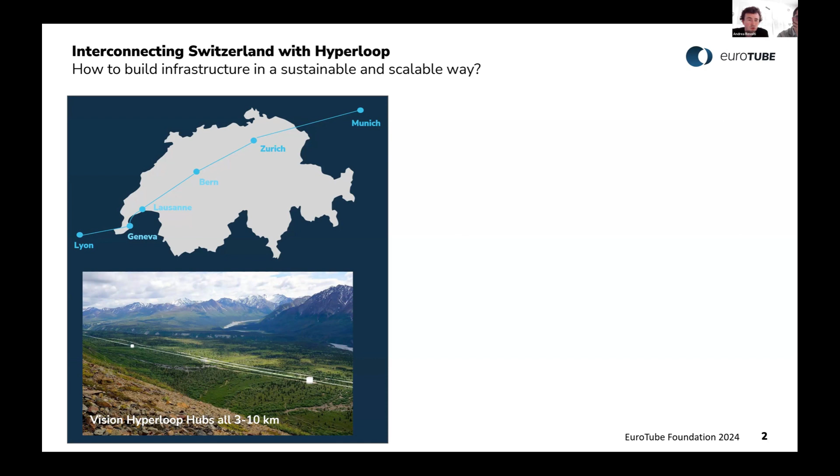For this, together with the University of Bolzano, ETH Zurich, and TU Delft, EuroTube has launched since 2022 a research project on how to realize so-called mobile factories, which are also smart because there is a digital twin behind them, such that we know specifically where along the route it makes sense to build this factory, so we're able to come in with the material, assemble the pipe work, and install it on site. Now I leave the word to Andrea, who will present more specifically how this mobile factory looks and how it's realized.

Thank you, Daniel. So today I will present some of the results of this project, called the Smart Mobile Factories for Infrastructure project. It's a collaboration between ETH Zurich, EuroTube, UniBZ (University of Bolzano), TU Delft, and Eindhoven. This is the site of the project, so if you want more detailed information you can visit it—I think it will remain available after the presentation, and we can share it on LinkedIn maybe.

Today I will speak about WP1, which is the design of the smart mobile factories and logistics. Then I will present some hypotheses for WP2 and WP3 with some specific ideas.

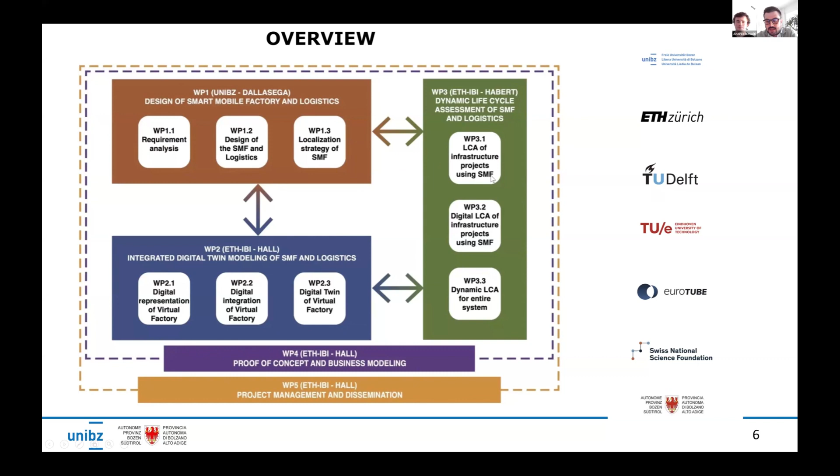The first WP was related to the design of smart mobile factories. So we had to understand the requirements of this factory, and we started to collect information with EuroTube. At the end of these meetings, we had a summary of the main and subordinate requirements for the smart mobile factories.

For example, one of the main requirements was to allow easy assembly and disassembly of the factory, obviously, and to allow adjustment of the factory so we can change its shape, dimension, and volume. We have to reduce the carbon footprint of the factory—so the idea is not to have a concentrated, static position for producing the Hyperloop rings, but to move the factory near the head of the building site and construction site to reduce the movement of all the pieces. We also have to minimize the logistics and intralogistics effort in and of the factory.

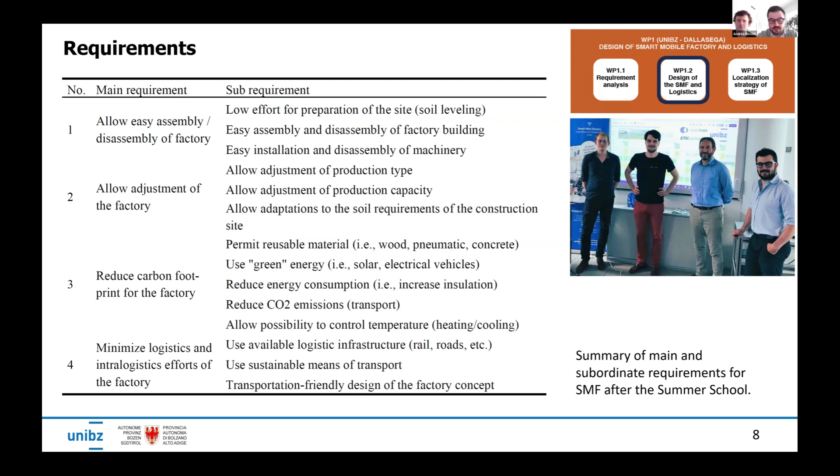After these requirements, we looked at the analysis of the volume and working areas we need. The idea is that we can use for the foundation of the factory a so-called 'tatami' foundation—an ancient idea from Japanese culture, in which with a unique module for the foundation, we can realize different dimensions and shapes of the working areas.

So by changing the site where we want to build the factory, we can have different volumes, different forms of the factory, without losing usability of the factory.

Then we move on with the idea that we can divide the factory. So we have module 1 that is specific for the prefabrication of the component. Then we have a drying area, and then an assembly factory for the assembly of the component, the post-tensioning, and the sealing of the finished tube, which is composed by 10 unique pieces of ring made in concrete.

These 10 pieces have to be post-tensioned, and then we have to create the vacuum inside with the procedure of sealing this tube.

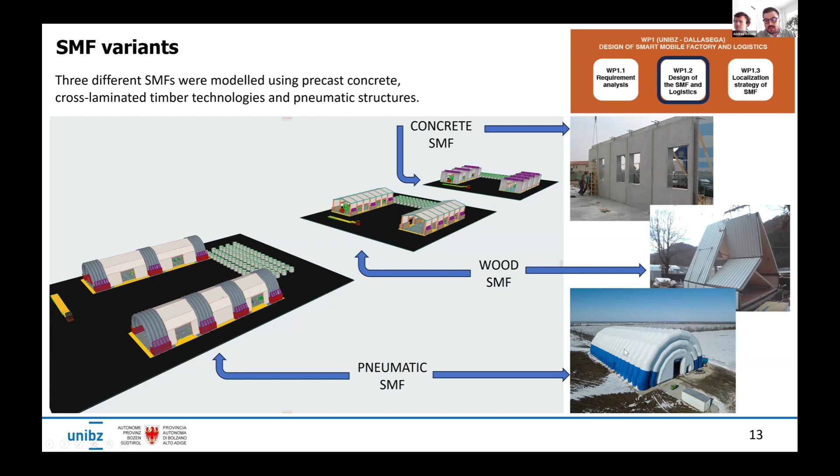The third one is composed by a pneumatic structure that we can use for a long time, and it's very easy to move to a new location and rebuild. Now I can show you a brief video of these three different options.

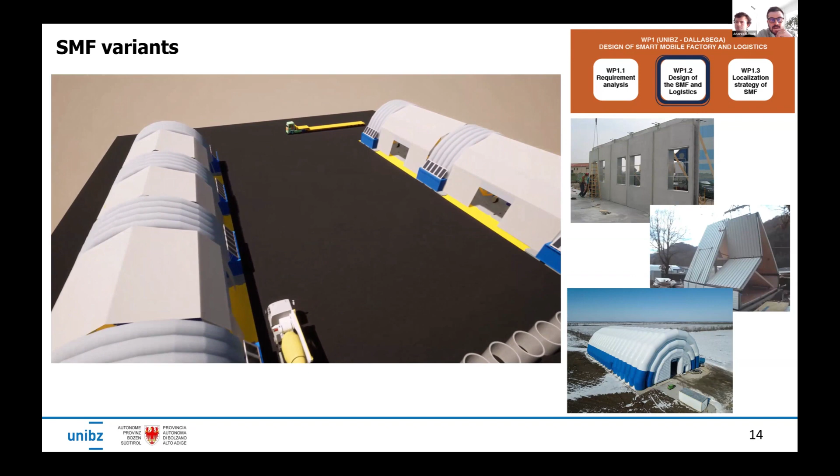This is the option with the pneumatic solution. You can see that we divided the factory into two different working areas. The first one, on the left, is for curing, construction, and creation of the unique ring.

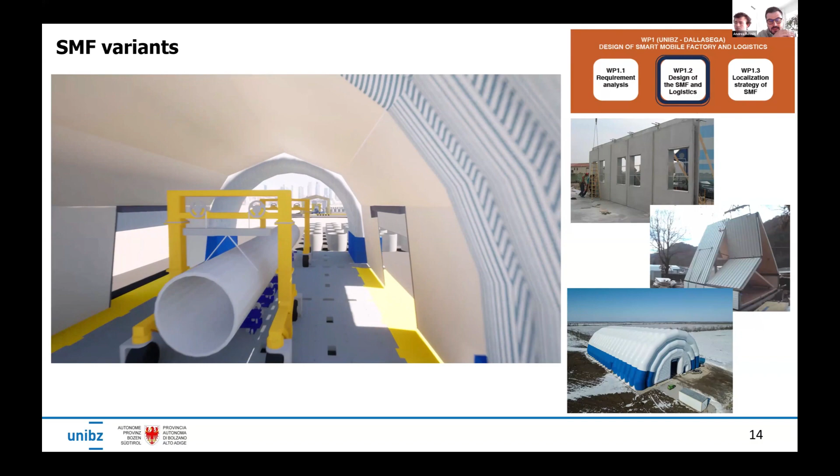In the second area, we build the final tube with the 10 pieces, and then perform the sealing and post-tensioning activities. Now we can move on to the second type of factory, made in wood.

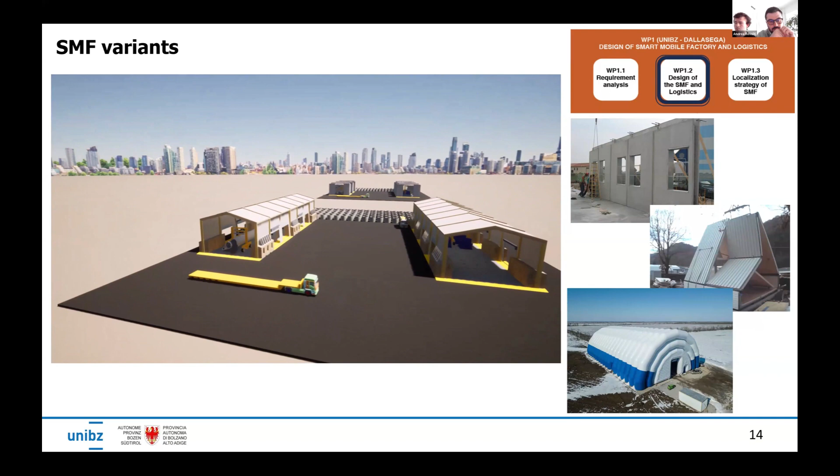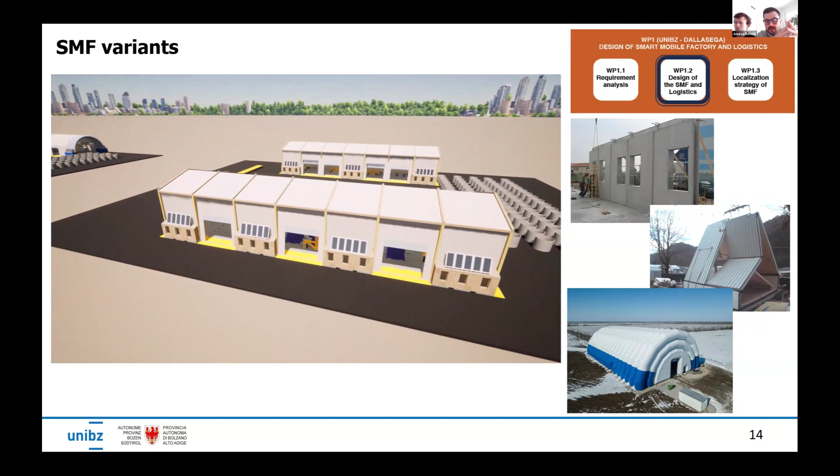That is a good option, but we have the problem that the elements in wood cannot be reused as many times as the pneumatic one, because of issues with the connections between wood-to-wood structures and wood-to-concrete connections.

And this is the third one, which is the most unfriendly from an environmental perspective, because we have to move the heaviest components for the factory, which are made in concrete.

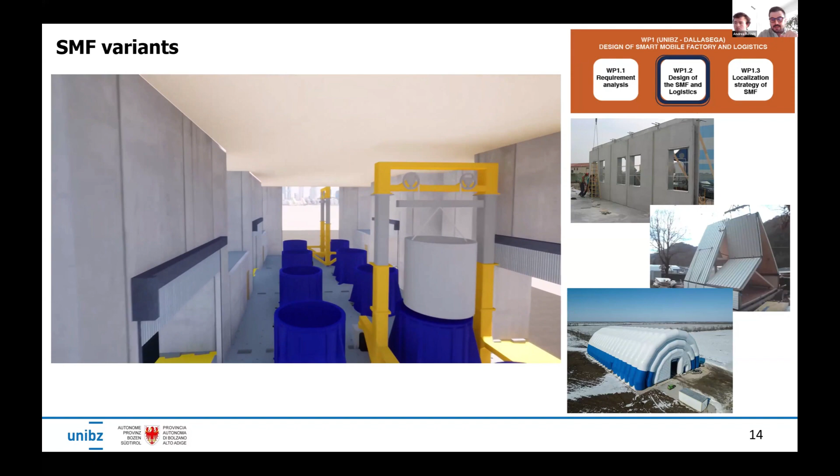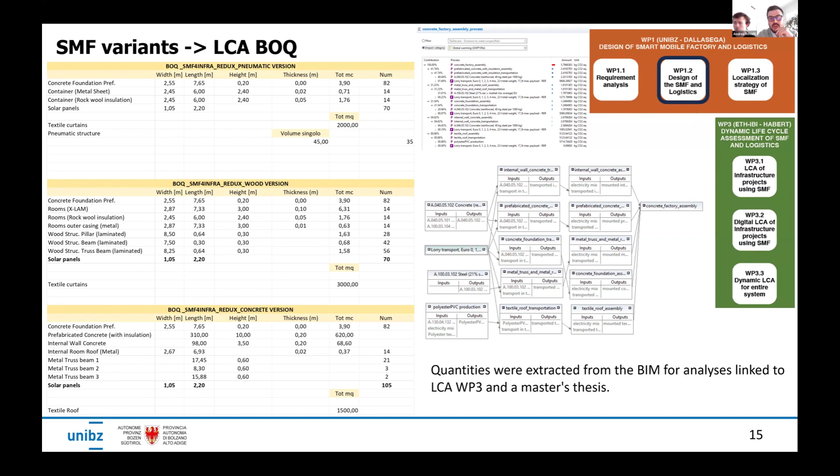Using this BIM model, I can extract the bill of quantities with all the components for the three different versions of the factory, and use this data to perform a life cycle assessment analysis to understand which is the most environmentally friendly and most useful type of factory over time.

Then I created the WBS, the work breakdown structure of all the activities we have to do for the construction of this factory.

In the first column, you will see the site layout setup with all the tasks. Then we have the prefabricated construction for the foundation and assembly on site. And then we have the 3 different options: the wood one, the concrete one, and the pneumatic one.

We can see that the pneumatic one is the easiest to assemble, and costs less in terms of environmental cost, using less machinery as well.

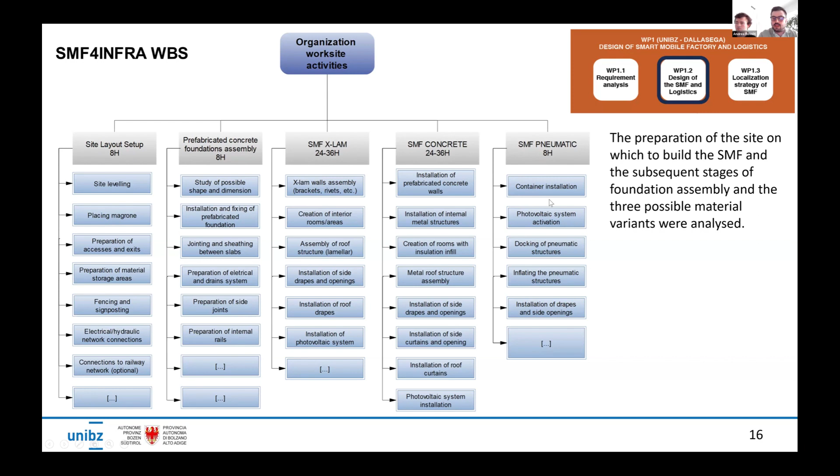So we have some machinery that we have to use for the preparation of the layout, the site, and the assembly of the foundation. We cannot change this part of the environmental cost.

But if we can choose which is the least complex to build, obviously we can go with the pneumatic one, because we need a truck with a crane to move the pieces of the container, and then another truck with only a compressor to build the factory.

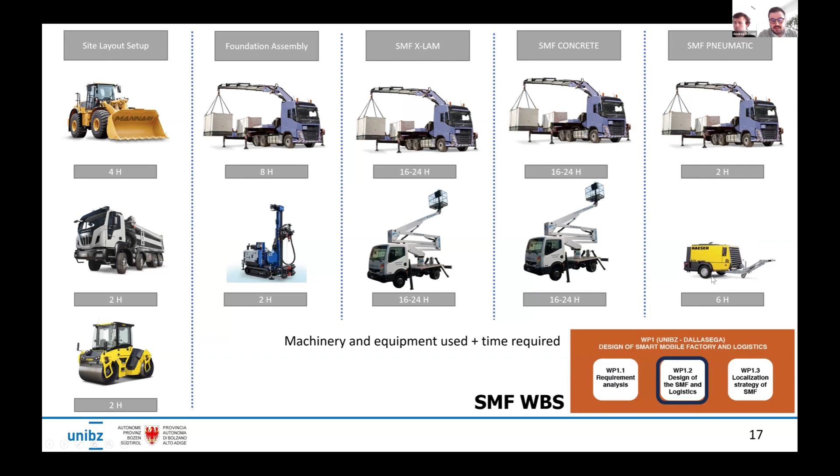We can also study different layouts of the factory. In this case, it's called layout T. So the factory is a unique single piece with the drying area above, and the strength is that you have one single structure, so you will have less construction effort, but we have several shortcomings.

For example, higher transportation effort. Mixer trucks have to go inside the factory, so we have air pollution, more noise, and it's not possible to split module A and module B to work independently.

Then we have layout L, in which the factory is split into 2 modules, and the strength is that we have more flexibility of working spaces, less transportation effort, and module A and B can work independently.

We have indeed some shortcomings. The module 1 and module 2 are divided, needing more time to build. We have difficulty with FIFO, the acronym for first in first out, for the component storage area. Also, the mixer truck has to go inside the factories in this case.

Then we have the S solution, which is the most interesting to build if we have enough space in the construction site, giving more flexibility, less transportation effort, and again module A and module B can work independently. The shortcomings are similar to the L solution, but we can see in the comparison table.

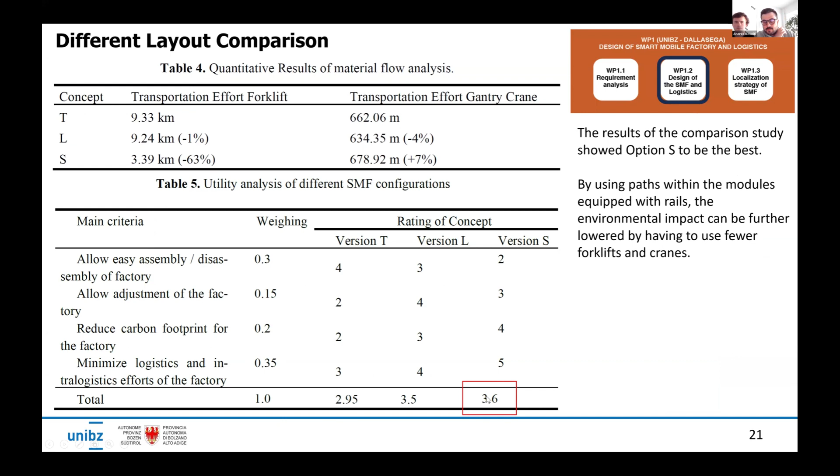We have less effort for the movement of the component, because we can move it directly, maybe using some railways inside the factories, to the drying area, and again it's easier to introduce to the sealing part and assembly part of the factories.

Each component and every asset of this BIM model is modeled uniquely, and I created a specific library with attributes that we can use when we want to extract and use the model in the Unity environment.

So going through versus the digital twin environment, in which we can add physics, real movement, and real sensors to the model, because the BIM is a sort of static photo of the working areas, the tasks, and the movement of machinery inside the factory.

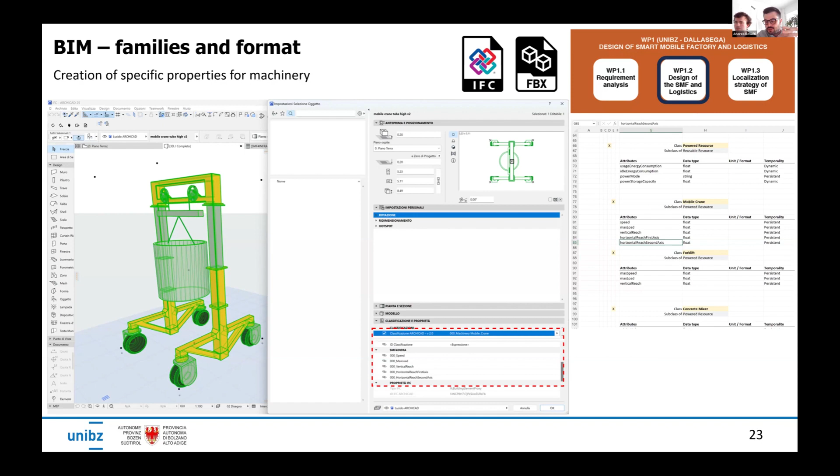With the digital twin, we can have real-time data that comes from the real factories in the future, and we come back with the real data that we can use also in the digital model of the factories.

We can divide the digital twin in two. We have a system monitoring of the building scale with also external data — that is the monitoring of the working and construction site of the factories, the scheduling of construction activities, the shape and space needed for each task and working area, and the optimization of the internal conditions of the factories.

And we also have real-time data of the logistics, with management of storage logistics and component movement. Then we can have another type of digital twin on the machinery scale, where we can focus on the mixing concrete area with temperature and mixer data, so we have real-time data of the concrete that will create the unique ring.

We also have the possibility to look after the alignment phase or the pipe sealing phase, where we also control whether we've reached the vacuum inside the final 20-meter pipe.

This is an idea of a digital twin, using maybe VR or AR assets like HoloLens or Oculus. We can have a look inside the factories and have dashboards with real-time data on how our machines or working areas are really functioning, whether we have the correct internal conditions in the factories, or maybe some danger coming for the workers inside.

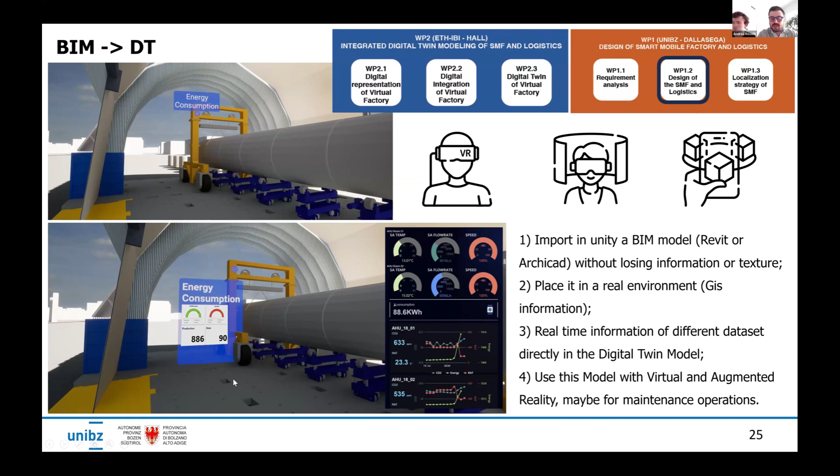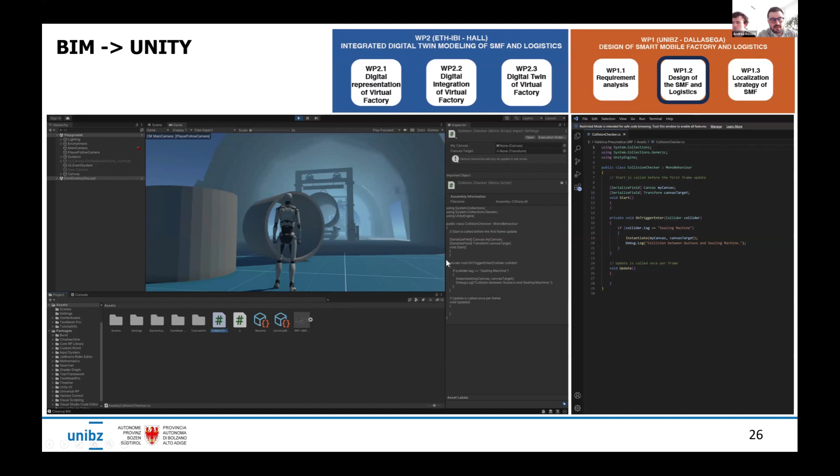I created a first hypothesis of moving inside the digital twin of the factory. This is my avatar, which I called Gustav, that can work inside the factories, look after information, and move some components. This is an environment in Unity, and I started coding to make some tests of the digital twin of the factories.

Then I moved also into the GIS environment, where I tried to locate the factories in a real environment. You can see the location of the factory, a hypothesis along the track between Zurich and Bern, and we found some locations where we could really build the factories.

And we made some tests also in a 3D environment, in which we can place the working area of the factory nearby the pipes that pass by the city.

Now, to finish my presentation, I can have a final focus on the wood hypothesis, which is very interesting for South Tyrol, because South Tyrol is well known for the wood industries.

So we tried to improve the biggest problem of the wood factory — not the material, because wood is very friendly for the environment, but we have to focus on the connection, which is the part that we cannot reuse as many times as we would want.

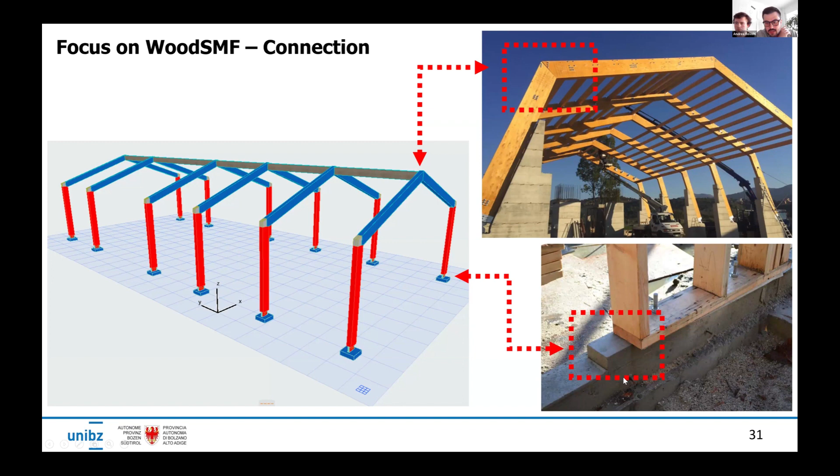With a bachelor thesis that I followed as a tutor, we collected information on specific nodes, the wood-to-wood connection and the connection between wood structure and the concrete foundation. We made a hypothesis to have three different connections with the concrete, and we decided on some characterization in which we could vote and compare.

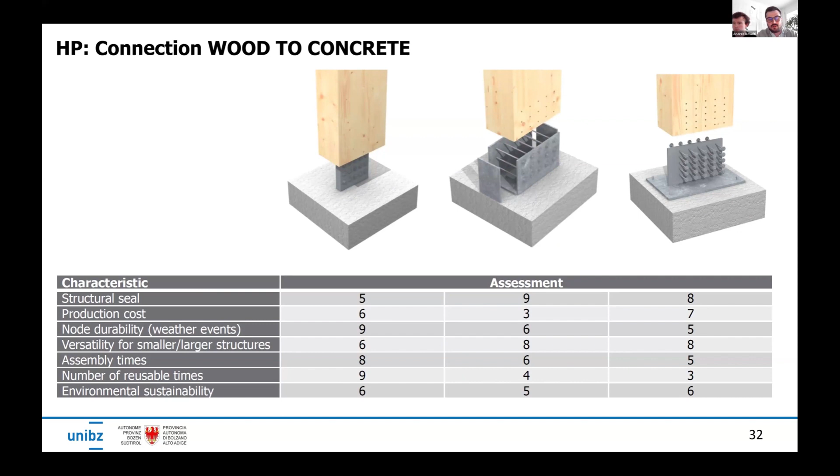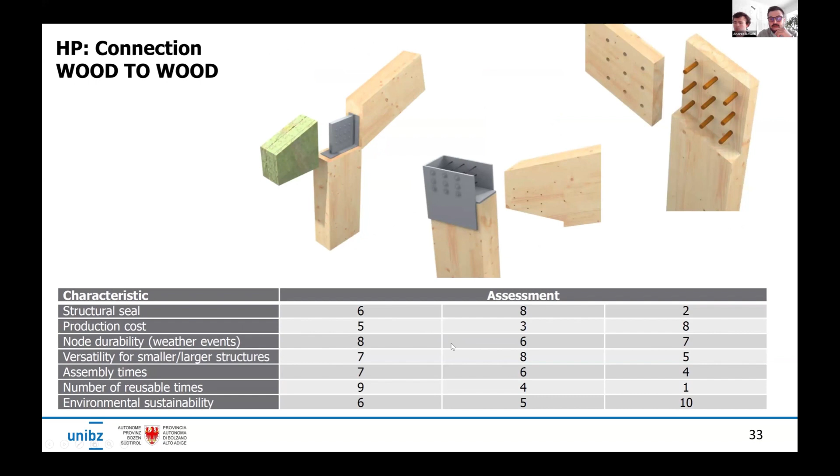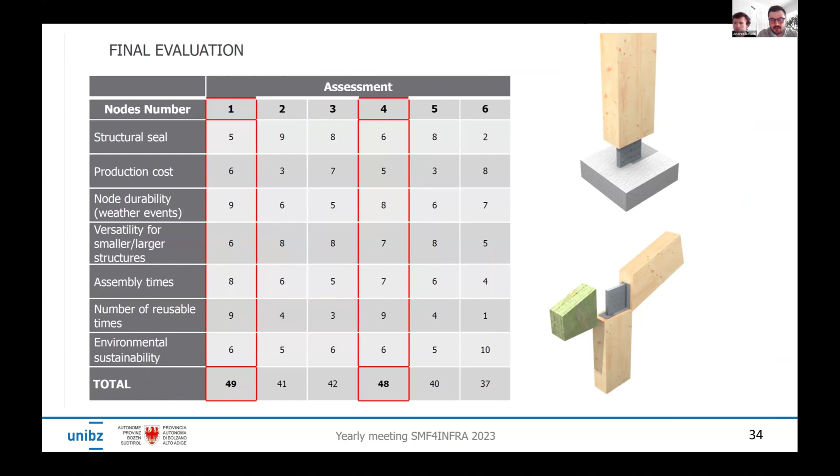Criteria included structural seal, production cost, durability, versatility, assembly time, number of reusable times, and environmental sustainability. We created the same comparison for the wood-to-wood connection, also voting with the local company, and decided on the final solution that makes the wood structure more reusable.

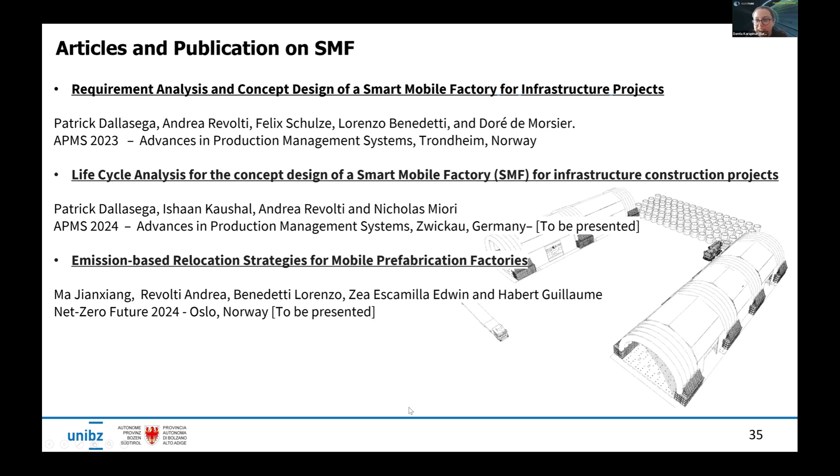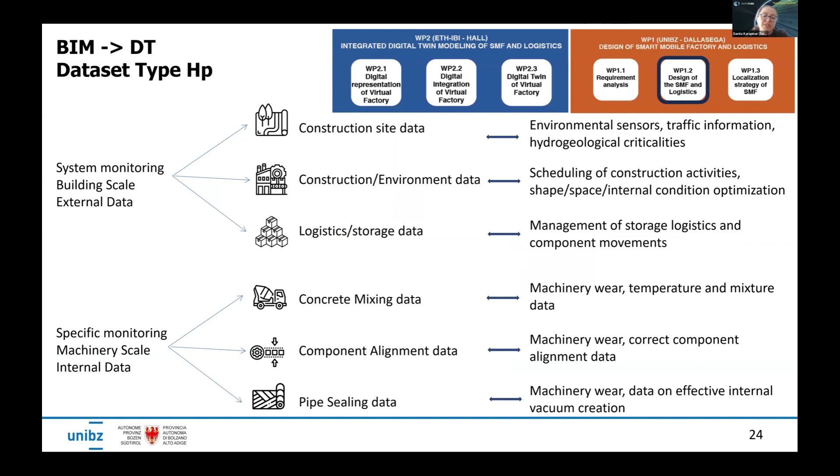Thank you, Andrea, it's very interesting, at least for me. I thank you for your presentation too. I've seen a couple of questions in the Q&A I might address now since we have time. The first is about the Hyperloop landscape - many organizations are designing with steel, not concrete, like Eurotube. How do you imagine smart mobile factories for steel tubes instead of concrete tubes? Do you have any plan B for steel tubes?

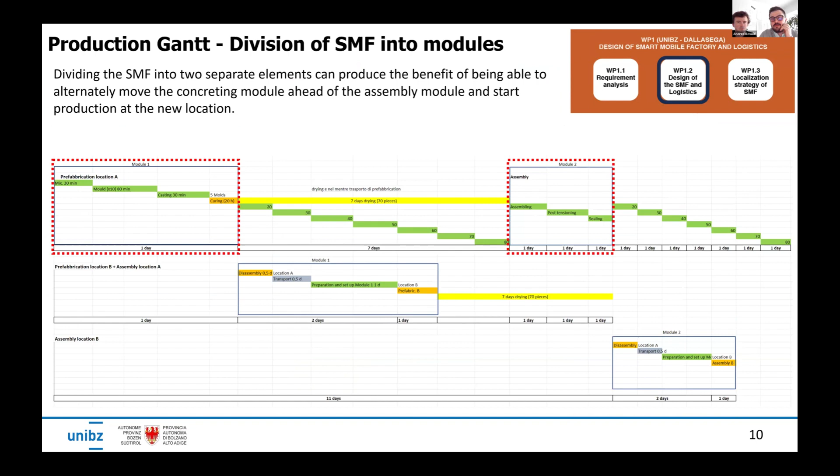I think the idea of a reusable shape for the factories can change if we need more or less space. With the tatami approach, for a steel construction we might not need some working areas, like the curing part of the pipe. So we'd need less space, and we can reduce the entire factory with fewer components and foundation pieces, and the height may need less space too, so we can reduce using the pneumatic tent very easily.

Instead of concrete, we can also use steel production or other types of production, because we can build railways, bridges, or reuse these factories for any infrastructure project, in my opinion. So the idea of mobile factories isn't connected only to Eurotube production - these are use cases, but we can use the factories anytime for any other infrastructure production.

Good, good, it's very good to hear it's not limited to only concrete use cases. So the next question: this smart mobile factory concept would be very interesting for potential private companies or even state governments, for sure, because they might use this concept for tenders, for example in Hyperloop projects. Do you have any plans to let them use your concept? Do you have any commercial purposes after your PhD?

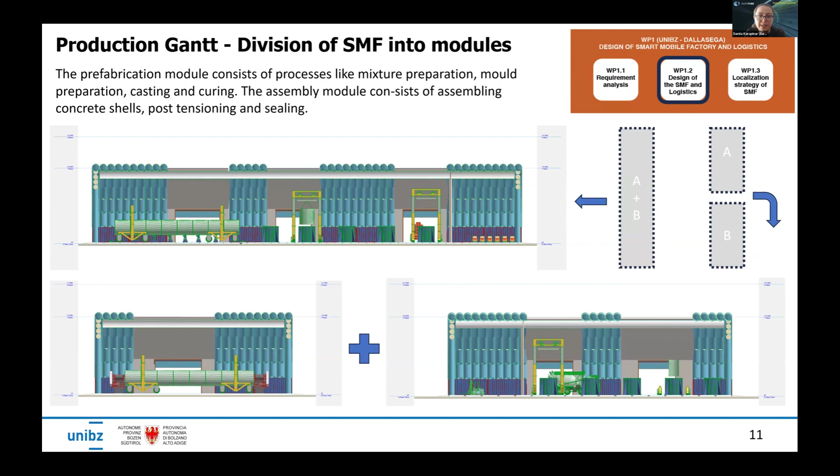We'll see. Good, we're looking forward to it. There's one more question: you have some layout types like S, for example - does this layout type really depend on the surface area available for the field lab?

Okay, and then how will you make sure you choose the best layout type? In this case, we don't have to choose the best layout, but for future ones we will.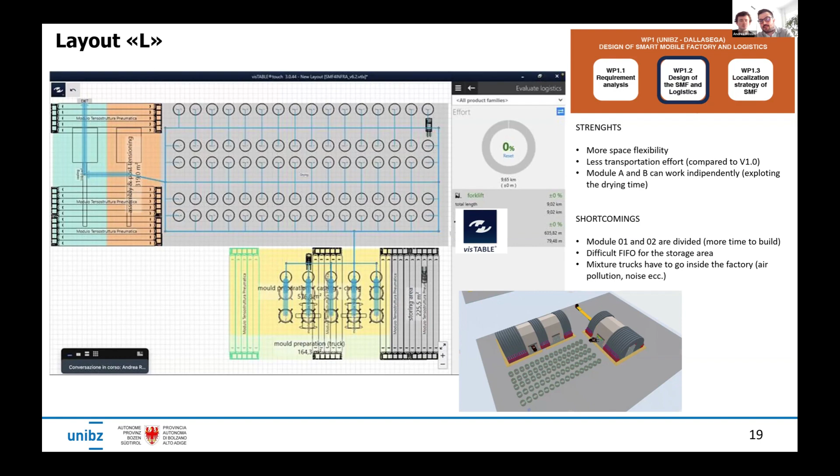We have to make an adaptation of the optimum to the real construction site. This is the site and the shape, if we have enough space to build in this form. But the field lab has a very restricted constraint because we are in an airport and have a real building nearby. So we have to maybe use a shape that is not so convenient, but useful for that case. So maybe it won't be so optimized, but we have no choice in that case.

So we'll see. Good, very good. Thank you very much for your presentation.

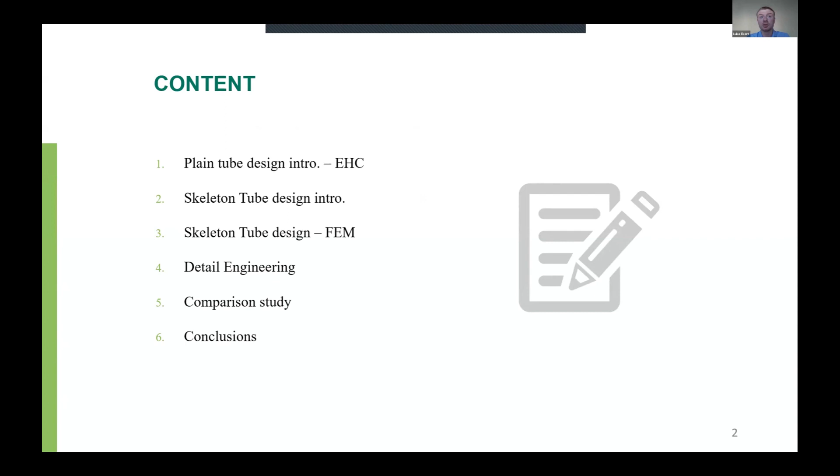Here is the content of today's presentation. First, I'll briefly talk about the benchmark design, the plain tube design, currently used at the European Hyperloop Center in Groningen, Netherlands. Then I'll introduce the skeleton tube design, as well as its results. I'll also talk about detail engineering for the skeleton tube design, and showcase the comparison study between the plain tube design and the skeleton tube design. I will end this presentation with conclusions.

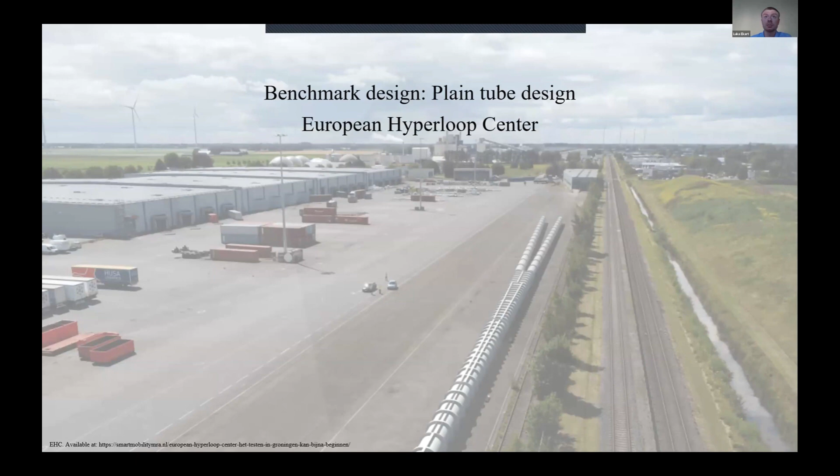The benchmark design is the already existing design located at the European Hyperloop Center. It was designed by Hardt Hyperloop, and I've named it the plain tube design, which is a simply spirally welded design. I had the opportunity to visit the production site as well as the test site in Groningen.

The global dimensions of the test site are as follows: total length is 420 meters, a single tube segment measures 16 meters in length, it has a diameter of 2.5 meters, and the thickness of the tube is 16 millimeters.

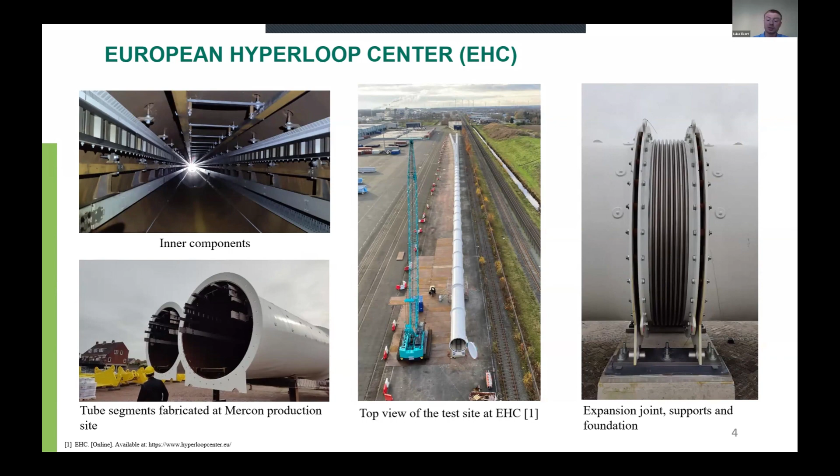This design by Hardt Hyperloop has been validated and analyzed, and it serves as a benchmark design in this research. Now, what are the infrastructure concerns?

Some of them are passenger safety, financing, government regulations, public acceptance, maintenance costs, and also, due to the potential length of the Hyperloop infrastructure, a big factor of environmental impact. Due to that, many engineering firms are continuously researching and developing lightweight Hyperloop tube designs.

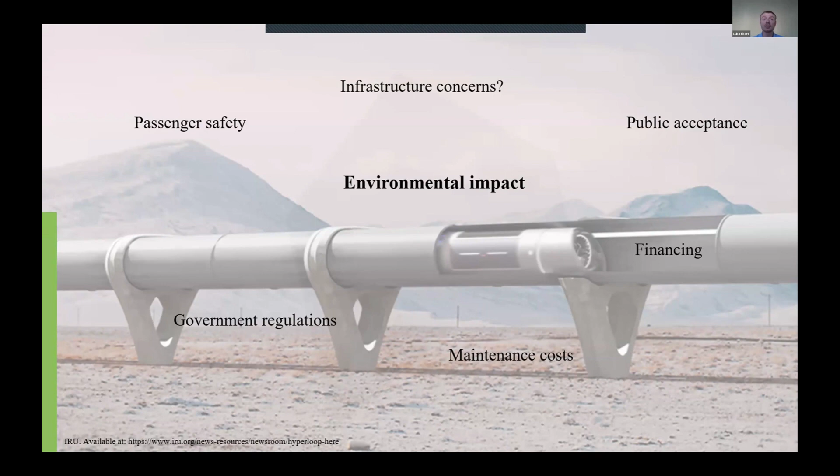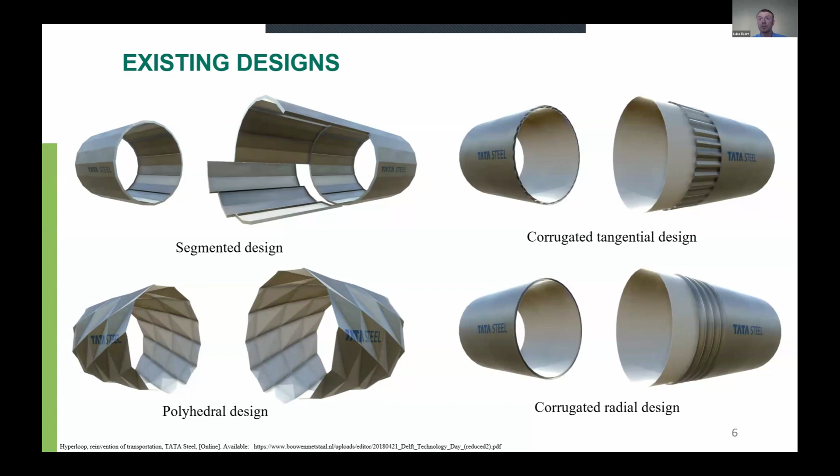Some of them are presented on this slide, all promoted by Tata Steel back in 2018. They can either be single layered, as seen on the left-hand side, or double layered on the right-hand side. Although they might differ in their cross sections, they have one thing in common: all of them are lightweight. Another such design is the skeleton tube design, which was the focus of this thesis.

The global dimensions of a single tube segment are the same as the benchmark design, the plain tube design, where the length is 16 meters and the diameter is 2.5 meters.

Now I'm going to run an animation to showcase how the tube is constructed. A single tube segment has 16 rings, spaced 1 meter center to center. There are 18 stringers, which are the longitudinal members, and consequently also 18 plates. Those components will also now be seen on the right-hand side, so I talked about the stringers and the rings, as well as the plates.

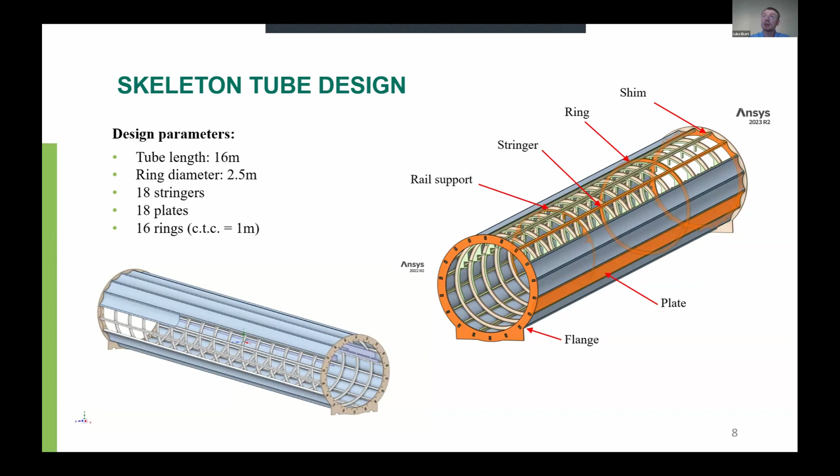Furthermore, we can see flanges, which mark the beginning and end of each tube segment. Then we see rail supports onto which the rails are attached, and then the shims. The shims are attached to the flanges, fully fixed, and they have two purposes: one is to support the stringers in those slotted holes, as can be seen here, and then they also have a saddle onto which the plate is transversely connected.

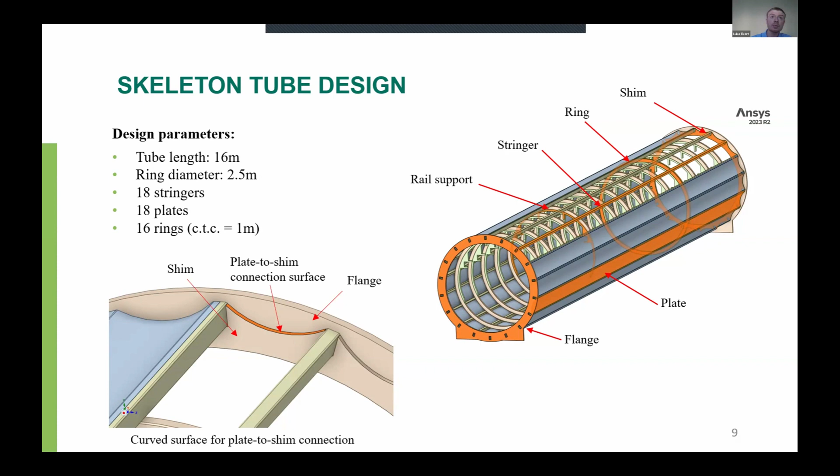Now, the skeleton tube design has been showcased by Tata Steel for the first time in July 2022 in one of their promotional videos, and then furthermore it was presented during the European Hyperloop Center kickoff event. You can also see two models, the plain tube design and the skeleton tube design, one next to the other.

Now, what does it remind us of? It can remind us of an aircraft's fuselage structure or a submarine structure. And in both cases, we can see the rings, the stringers which connect the rings among each other, and then the shell which forms the shape.

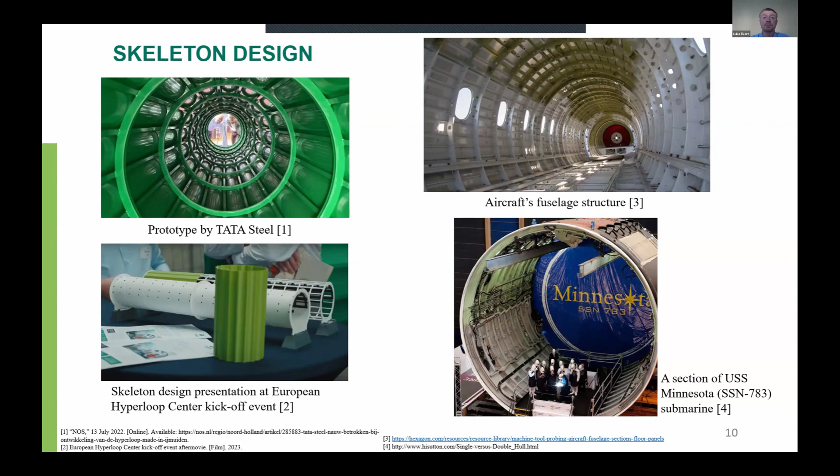Now, before I'll present to you the FEM results, and before I could make a global model, I had to model rail supports. I started out by identifying the location of the inner components. Then the first iteration of the rail supports was just a ring reinforcement, and based on the location of the inner components, I've designed the rest of the rail supports.

At this stage in the analysis, the model exhibited a plastic response at those two locations. This is because of a sudden change in stiffness of the ring, and therefore the stress surpassed the yield strength. Therefore, I've extended the edges of the rail support, and this did not only mitigate those stress concentrations, but it also additionally reinforced the structure.

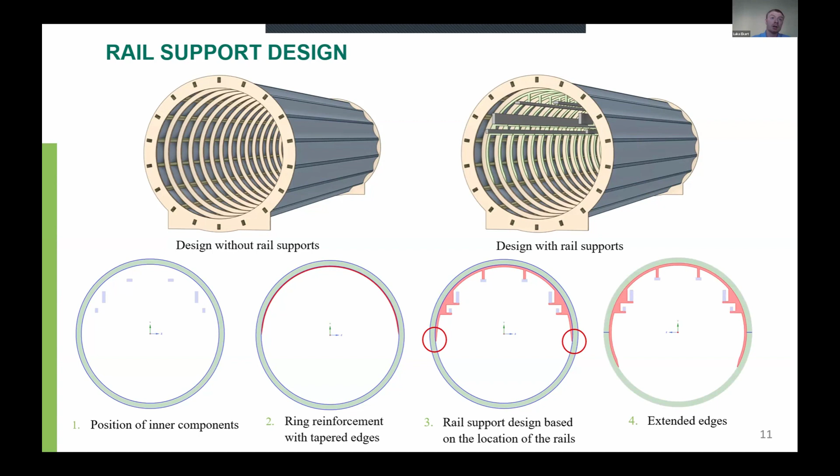So in this research, I've made two assembly models: the full-scale model, the 16 meters long model, which was to verify the global vertical deflection, and then a shorter model, which had more details, a 5 meters long model for the ULS verification, as well as for the buckling analysis.

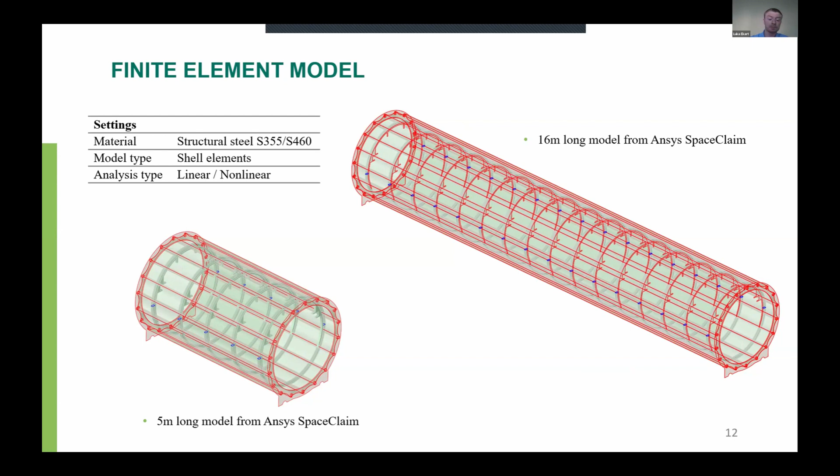Now I'll go through the load cases which are considered in this research. First of all, it's the self-weight, which is self-explanatory. Then we have the vacuum pressure, which is acting on the plates, on the inner surface of the plates. Now, the vacuum pressure is uniformly acting on the inner surface, and moreover, it's acting normal to the surface, looking at the figure on the bottom.

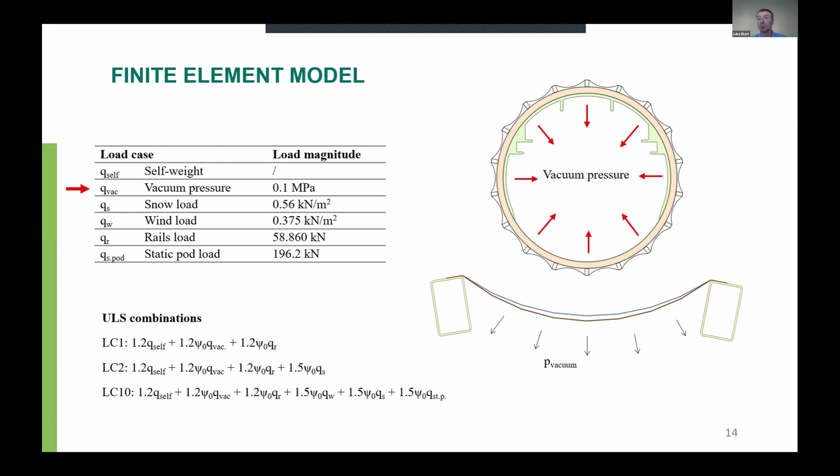Furthermore, the snow load was added on the top of the tube, the wind load acting from the side, and then we have the rails load and the static pod load, which was assigned at the locations where the rails were supposed to be attached, those red surfaces.

In this research, I've considered 10 load combinations. In this presentation, I'll present 3 of those: LC1, LC2, and LC10. Now, LC1 only considers the vacuum pressure as the critical load case. In LC2, the snow load is added on top of it, and the critical load combination, LC10, considers all of the load cases which I've just presented.

So let me continue with results. First, I've verified the global vertical deflection. The SLS load combination was used for this analysis. Now, there are 2 deflection limits. The first one is imposed by the Eurocodes, which is 3.5 millimeters. And the second one is imposed by the levitation rails.

Now, the levitation rails are made out of 1 meter long segments, as seen on the bottom figure. And there is a 1.5 millimeters allowed vertical misalignment for the rails to be operational. So this is a second deflection limit.

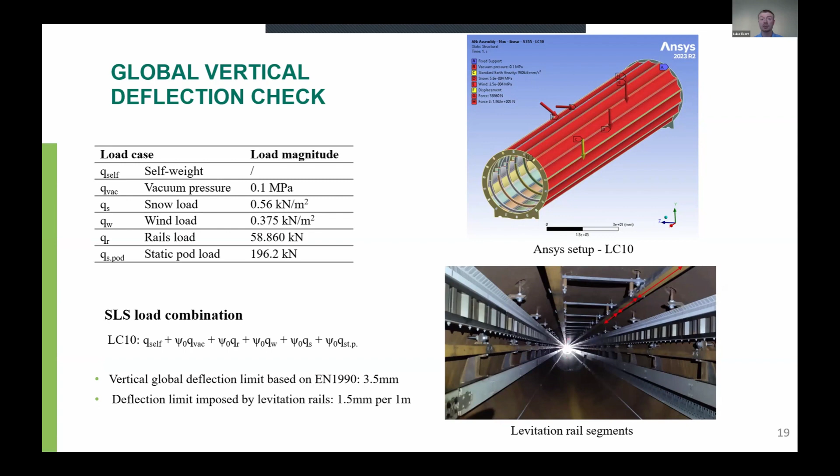And upon analyzing the assembly, the global vertical deflection resulted in 3.34 millimeters. Now you can see that I've taken the data from the side of the ring. This is because a vertical ovalization is expected in the rings of the structure of the assembly. But when you take the data from the side of the ring, those results are unaffected by vertical ovalization.

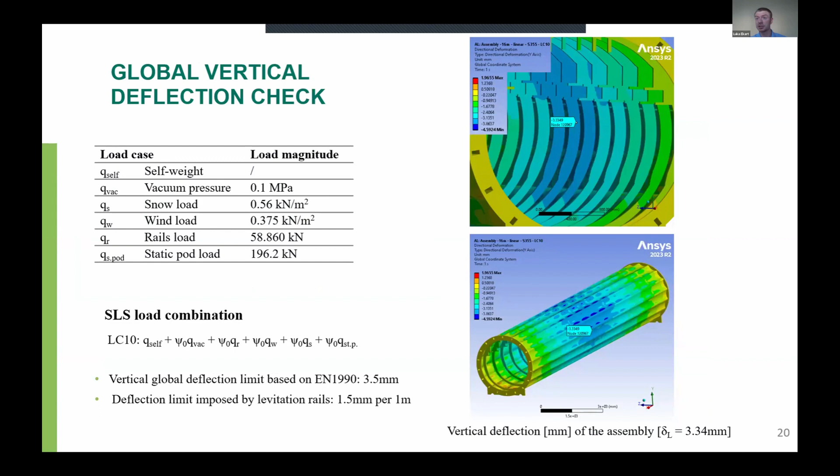And to add, based on the global vertical deflection, the deflection is satisfactory. Then I'll present to you the local deformation of components.

Now, in this graph, you can see deformation of critical plate, stringer, and ring. Now, 3 load combinations are presented in this one graph, and those load combinations are also marked with the time steps, as seen over here.

Now I'll run an animation just to showcase how the deformation propagates during load combination 1. So on the top right, you can see the development, and we can see that the largest deformation exhibits in the plates.

Now to also showcase the deformation of the frame, I've removed the plates. Now this deformation is scaled up just for visualization. On the bottom, you can see that the frame gets squeezed together. So the largest deformation can be seen at the side of the tube.

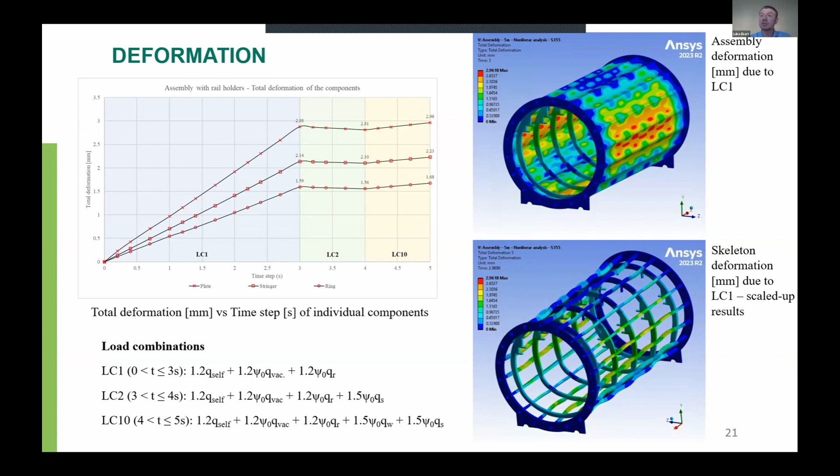Now this can be justified by looking at the stiffness of the rings. When I modeled the rail supports, they are fully fixed onto the rings, meaning that the stiffness of the rings is severely increased on the top side, while the bottom side of the ring has a decreased stiffness. At 2 locations, we can also expect a hinge-like behavior, because this is where the stiffness suddenly changes.

Now I'll run an animation of a single ring deformation. Once again, it's scaled up just for visualization. The wireframe will also represent an undeformed shape.

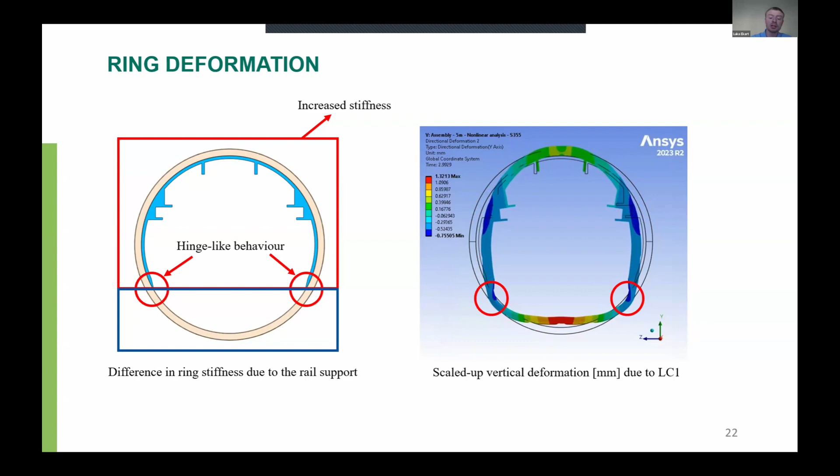So what we see is that the sides of the ring get compressed together. Furthermore, we see two hinge-like behaviors, as stated before. What else can be concluded is that we can define the major axis, or strong axis, of the ring, and the weak axis of the ring.

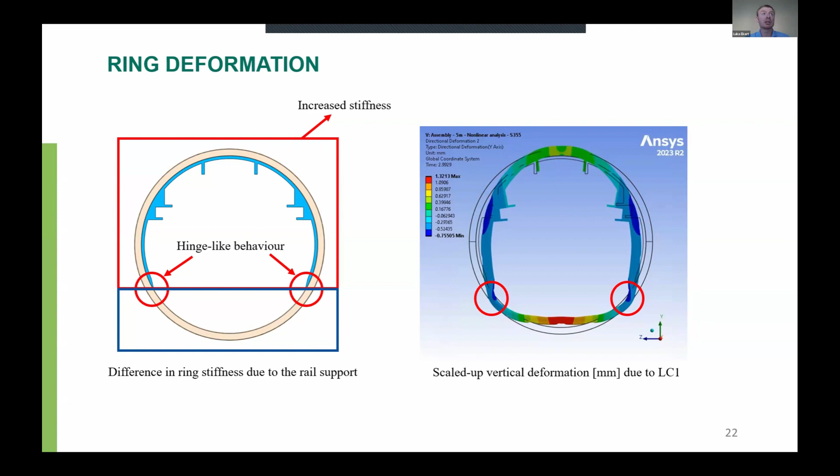Next, I'm going to talk about the plate deformation. Upon closer investigation, I noticed that the plate did not uniformly deform, but there was a larger deformation at the sides of it, while the middle had a smaller deformation.

This can be explained by taking a single strip from the plate, positioned between the rings. I've taken the cross section of it and scaled up the deformation, and you can clearly see a sinusoidal-like deformation.

This can be justified by deconstructing the forces within the plate. If we deconstruct the force at the side of the plate and look at it from the global coordinate system, it dissolves into a horizontal force component and a vertical force component, while in the center of the plate there's only a vertical force component. Due to the horizontal components, the center of the plate is tensioned, and consequently the deformation is lessened.

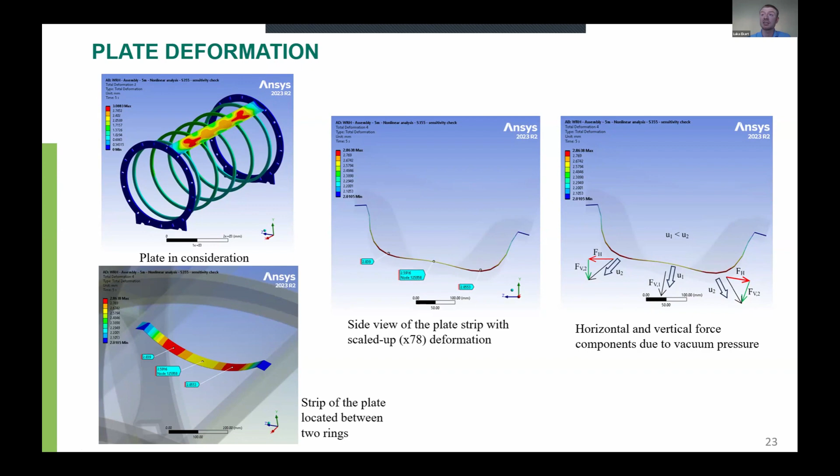Next, I'm going to talk about the strength verification. This graph can be read in the same way as the previous one with deformation, but in this case, on the y-axis we can see stress.

I'll run the animation of the stress development within the assembly on the right-hand side, due to load combination 1. Now we can see that the stress concentrations are visible at the locations in the ring where the rail support ends. This was as expected, and the largest stress was 342 megapascals, which is below the yield strength of 355 megapascals.

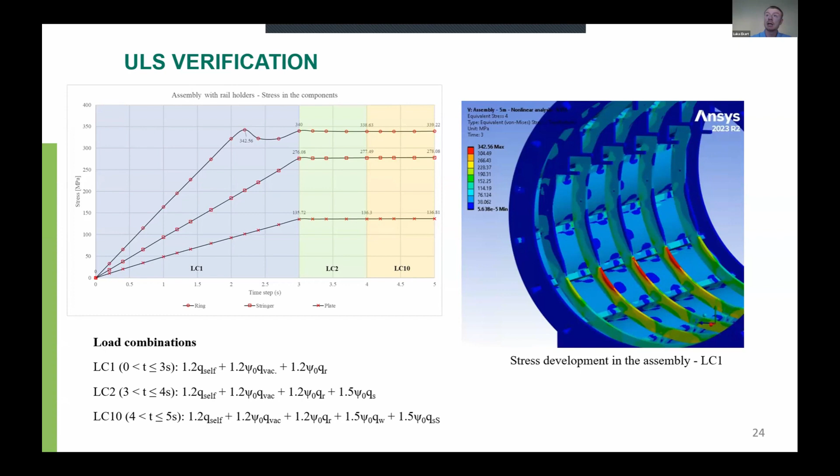Upon further investigation, I noticed more stress concentrations. In the top figure, you can see the one visible in the animation, and in the bottom figure, there are stress concentrations at each and every stringer-to-ring connection, and this is also where the stress reaches 342 megapascals.

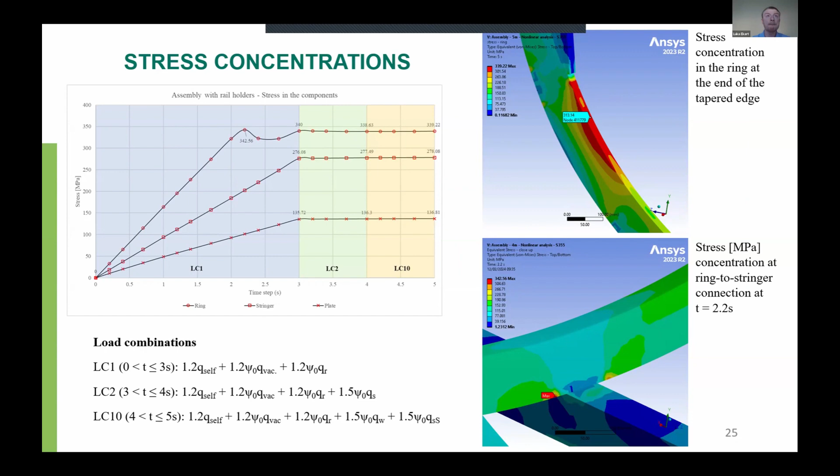Next, I'm going to present to you the eigenvalue buckling analysis. To understand the load path due to the critical load case, which is the vacuum pressure, the force is transferred through the plates onto the stringers, and then through the stringers onto the ring.

For this verification, I've used a full nonlinear analysis approach based on DNV standards, with the following workflow. First, I ran a linear buckling analysis.

Then I chose the buckled shape that I wanted to investigate. I determined the imperfection scaling factor, which was also done based on DNV standards, and then I ran a full nonlinear post-buckling analysis.

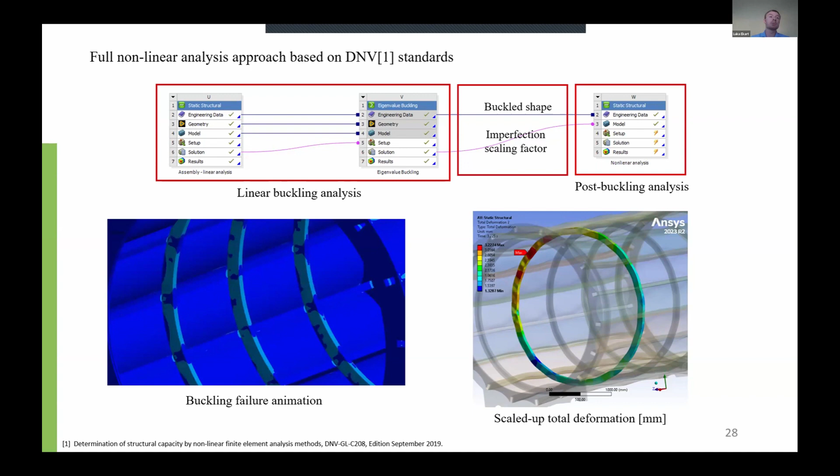Now I'll run the animation of the buckling failure. If we focus on the central ring, we can see that at a certain point it will simply buckle inwards, and at this stage, this is a collapse of the structure.

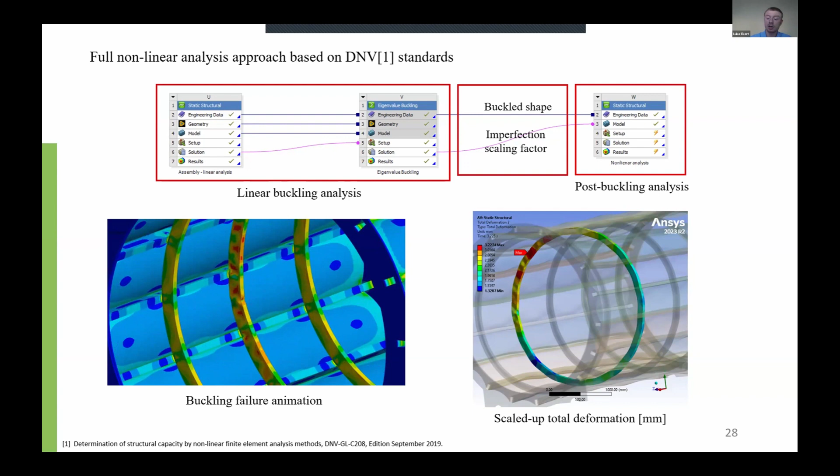I investigated this buckled location from up close. We can see that the webs of the ring buckled outwards, while the flange of the ring buckled inward.

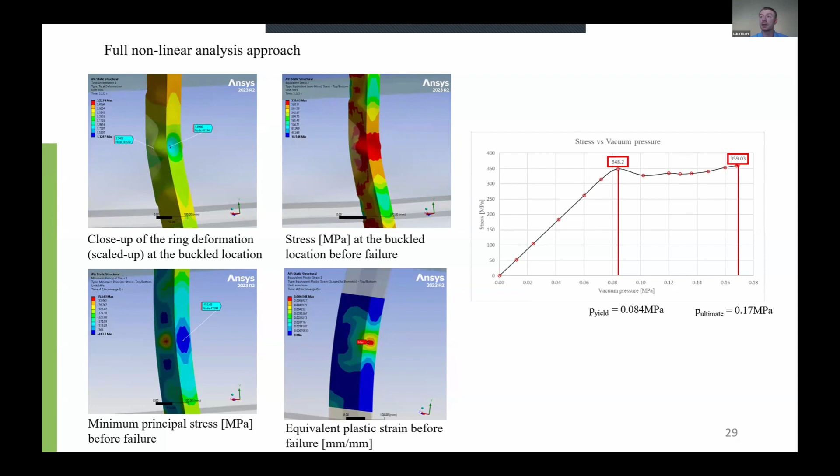Then there's some amount of strain hardening until the failure at a pressure of 0.17 megapascals. So to be on the safe side, we could say that the buckling factor for this design is 2.

Next, I'm going to talk about the detail engineering. The critical locations in this assembly are the ring-to-stringer connections, and there are 18 of such connections per ring. Considering there are 16 rings per tube segment, this results in 288 critical points in the model, meaning this detail needs to be analyzed and investigated.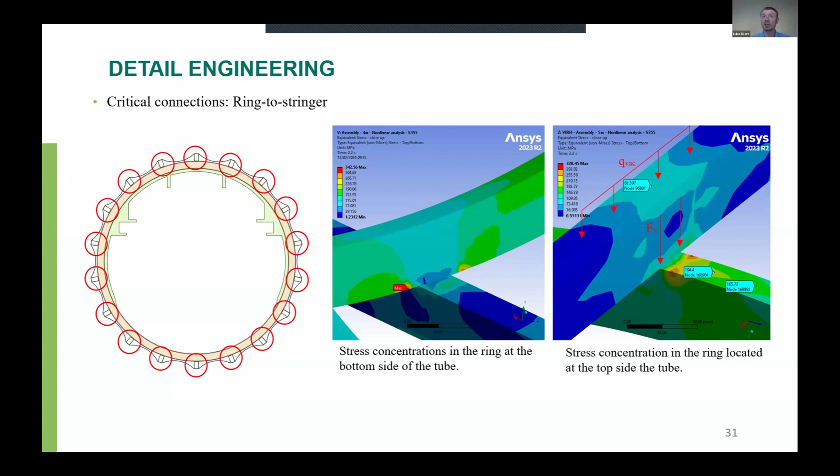And I came up with the following connection design: a bolted steel bracket connection design, which connects the ring and the stringer.

Now this detail is primarily in compression, and what else is special about it is that the bolts are non-preloaded. This is because of the slenderness of components, and I wanted to avoid any preliminary deformations during the assembly due to preloading of the bolts.

Let me take you through some of the specifics of this connection. The first one is the slotted hole. The load path goes through the stringer, transferred through the webs of the stringer onto the ring. The stringer will deform outwards as well as downwards, and if the slotted holes would not be present, there would be a threat of the bolts simply shearing through the webs of the stringer. So this accommodates any vertical movement.

The second specific is the curved surface of the connector. It follows the same radius as the radius of the ring, and this ensures that the force is evenly distributed from the stringer onto the ring, and also mitigates the stress concentrations.

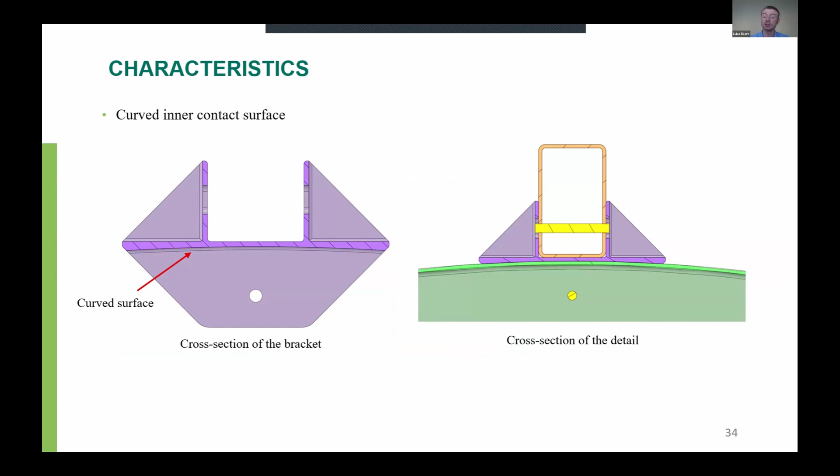Comparing this value with the previous value, which was 342 megapascals, we can see a severe reduction in the stress, meaning that the design serves the purpose of reducing the stress concentration and mitigating the plastic response.

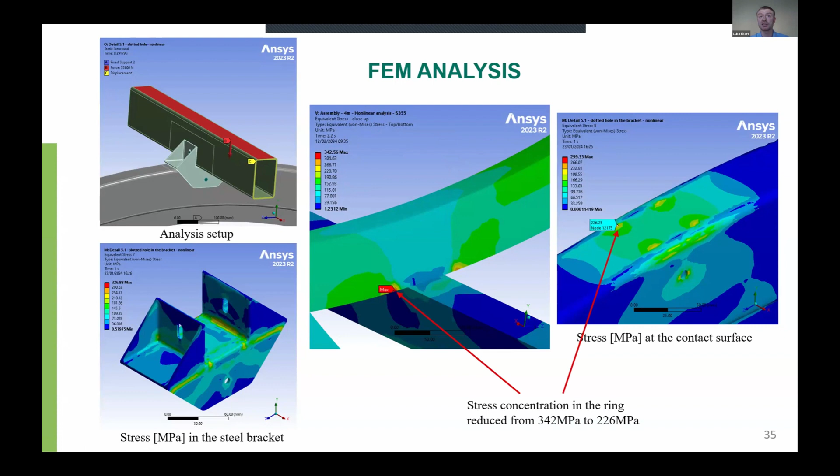Lastly, I'll talk about the comparison study. I'm slightly time limited, so I won't present the FEM results of the plain tube design, but I will only go through the comparison study.

First is the weight comparison. I compared both designs in terms of total weight. In the first comparison, I did not include the rail supports, meaning the tube would only serve the purpose of retaining vacuum pressure, but not supporting the rails and the pod. In this case, the weight efficiency was almost 38% in favor of the skeleton tube design.

In the second comparison, I've added the rail support to both designs, and the weight efficiency decreased down to 28%. But this is still a very significant weight reduction.

In terms of ULS, SLS, and impact load, the plain tube design quite significantly outperforms the skeleton tube design. This is due to a much thicker skin of the tube.

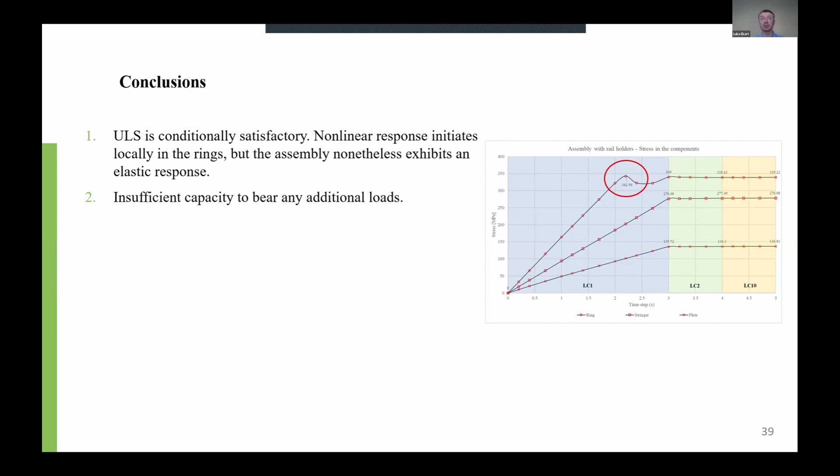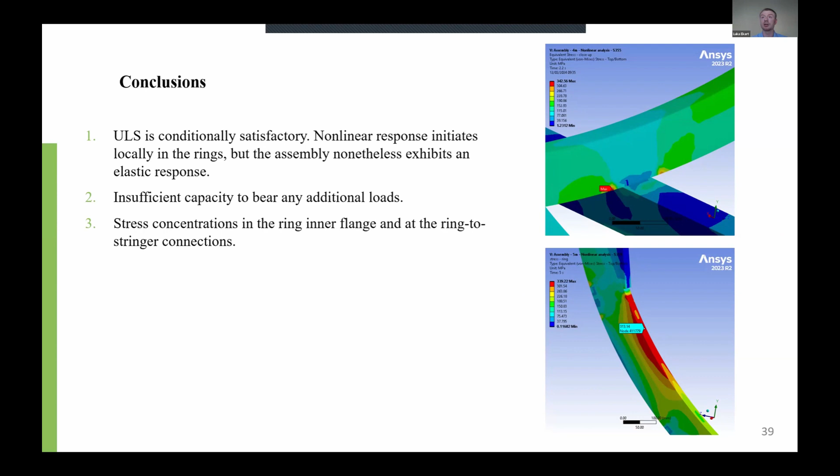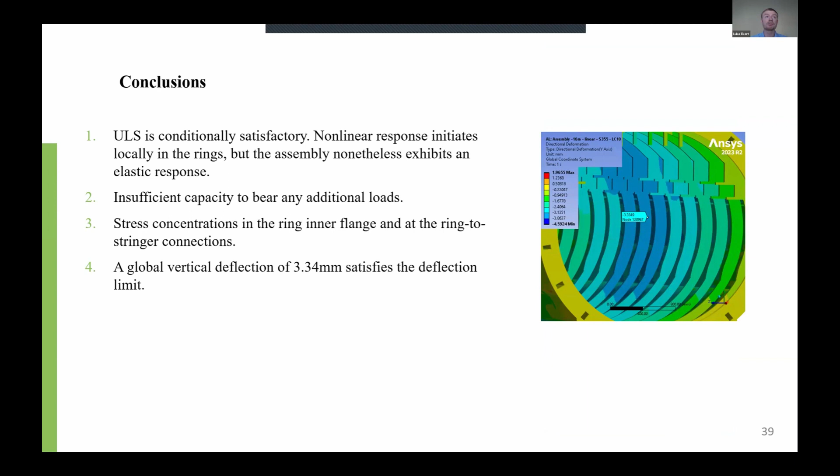I've identified 2 stress concentrations in the assembly: at the ring-to-stringer connection, as well as in the ring where the rail support ends. The global vertical deflection was satisfactory based on the deflection limits. Local deformations were also within the limits, primarily meant for the plates.

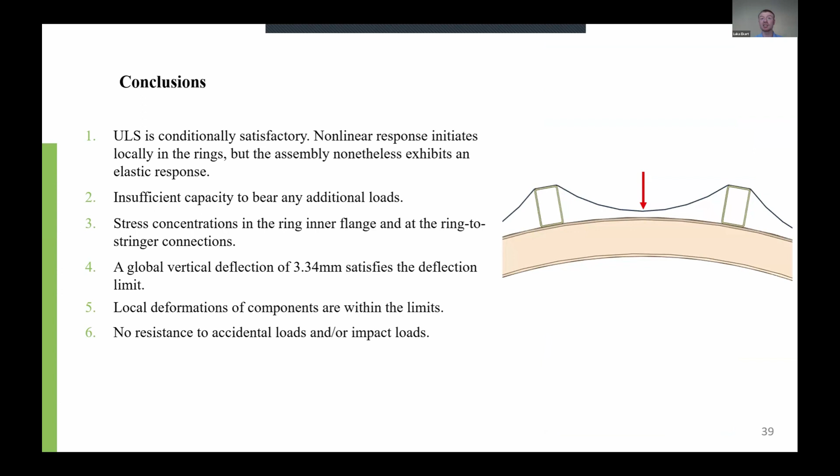Now, due to the very slender design and very small thickness of the plates, the design does not offer any resistance to accidental or impact loads. So this is one of the major drawbacks of this design.

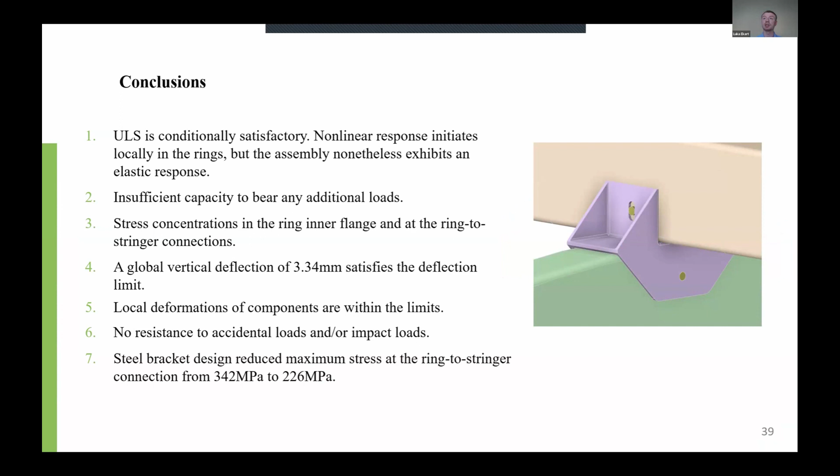And lastly, the steel bracket design reduced the maximum stress in the assembly from 342 megapascals down to 226 megapascals. And with that, I reassured that the assembly did exhibit an elastic response. And with that, I would like to conclude my presentation. Thank you for your attention. And now I'm open to any questions that you might have.

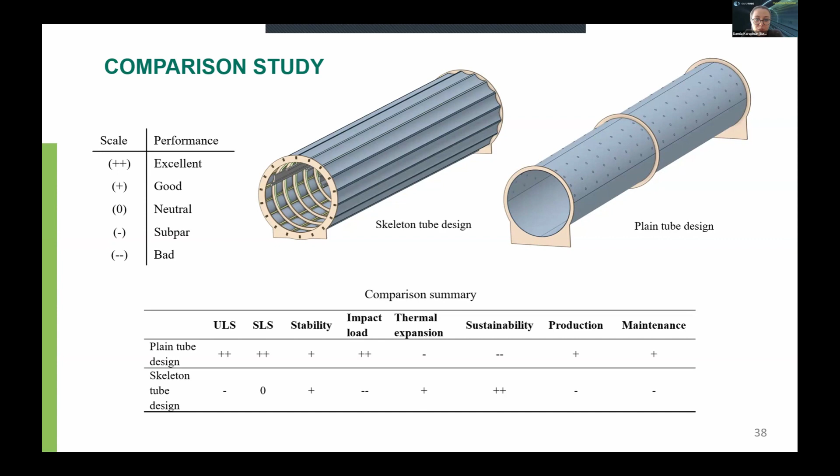Okay, very good. And I will take one more question for the sake of time. About the connection between the curved rib and rectangular shape beam, have you thought about the cost? Cost-wise, it looks like an expensive piece to manufacture. Have you looked into it?

So in the paper, you can also find where I stated what kind of production and fabrication processes could be utilized for this connection design. One of them is obviously CNC milling, but this is a very expensive process because there would be a lot of material waste. The second one is to simply mold those brackets, but there is a drawback: with molded steel, there might be very brittle failure modes. The last production process could be to just weld those plates together.

So looking at the design, we can simplify it into three parts: the side plates, which are two of them, identical, and the middle plate. So each one of them could be produced separately and then just welded together. This could potentially be the most cost-efficient production process, but this is something to be further investigated.